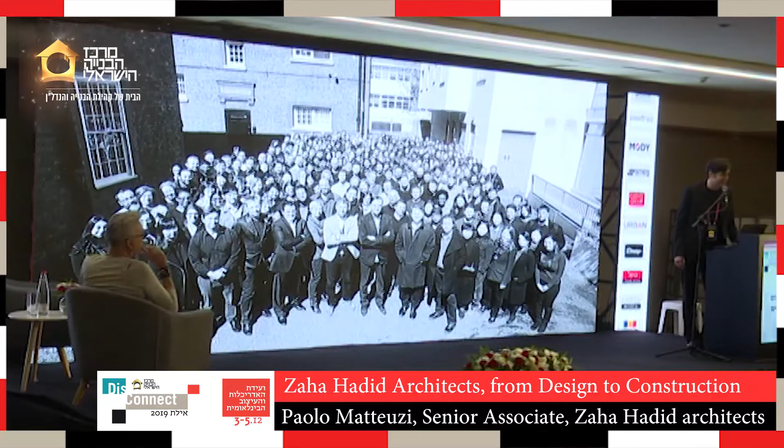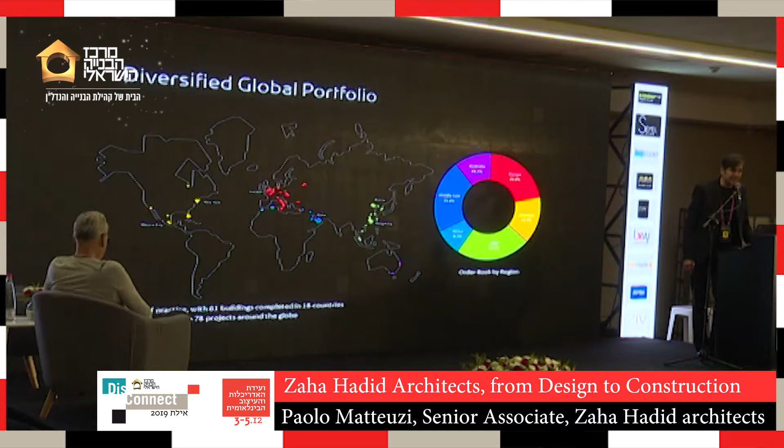Since she founded the practice back in 1979, we grew up significantly in a very niche market, I would say, thanks to her extraordinary vision and original approach to architecture and overall to the built environment. So we grew up, we are now 450 architects working from London, from Beijing, from Hong Kong, from New York, and we work worldwide. So we have projects in Europe, projects in Middle East, in Asia, in Americas. We recently expanded our business in Australia as well, where we are designing the West Sydney Airport.

So overall, in the past 40 years of our activities, we have built more than 81 buildings in almost 20 different countries, and we have more than 50 projects up and running under design development. So this is our latest delivered, completed project in Beijing, the Beijing New Airport Terminal. I think it's the biggest in Asia. Someone says the biggest in the world. I didn't check that.

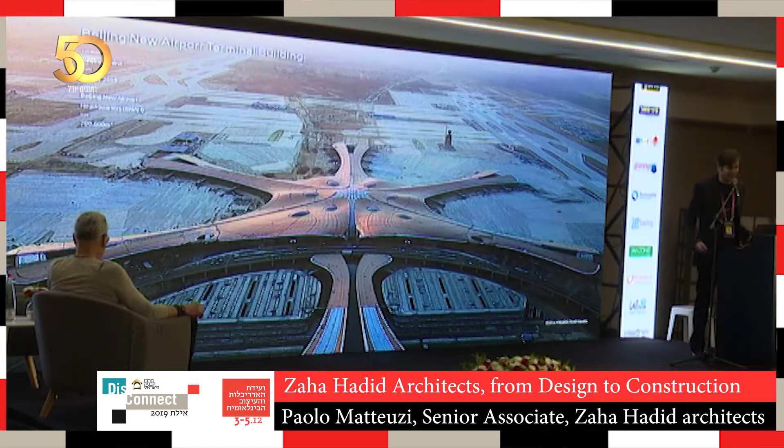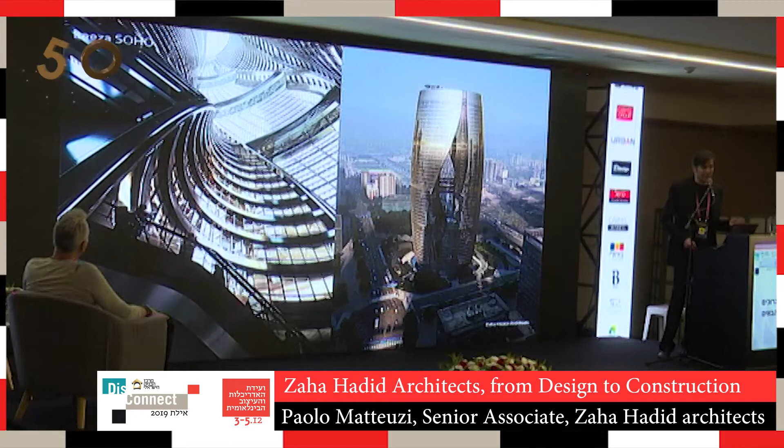Its star shape has been thought to optimize, because of the big size of the terminal, the passengers' movement inside of the building. The mega roof is supported by 6 concave columns, which are supporting the roof itself and also hosting the 6 elliptical skylights, which are bringing natural light inside of the building. This is again a building that we completed a couple of weeks ago, again in Beijing, and it's a set of twin towers which are hosting a super tall atrium which reaches the top of the building,

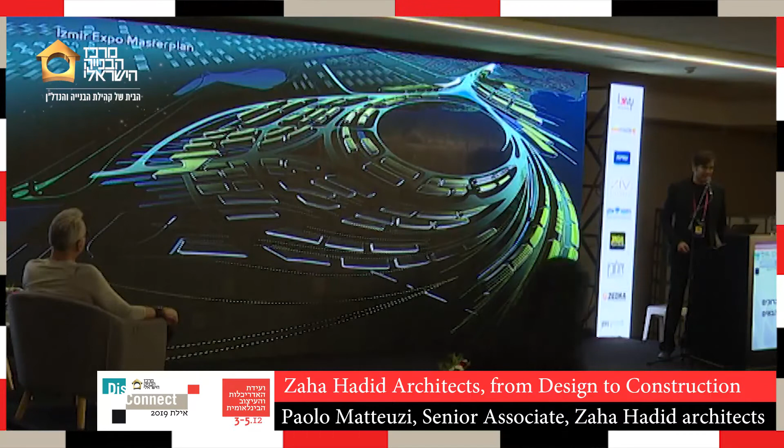so it grows up from the ground floor to 200 meters in height. Probably we are best known for our cultural landmarks, such as the Contemporary Art Museum in Rome. This is the first building I've been working on when I first joined Zaha back in 2002, or our cultural center in Azerbaijan. Overall, we do residential development, we do mixed use, we do master planning. Let's say that our activity around architecture and urban design and master planning is supported and driven by our internal research. So overall, our research is in data-driven design.

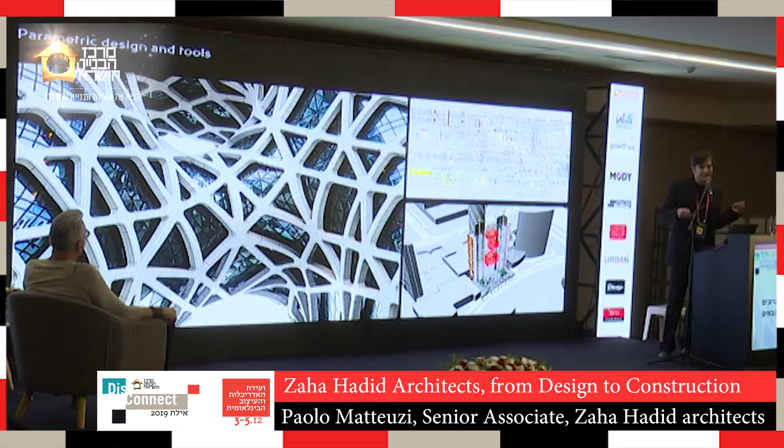So we recently opened several additional departments which are producing research inside of the company, such as the environmental analytics, the computational design, and the space planning department. Probably we are best known for our research in parametric design. So we have been pioneering this specific research in this sector over the past 10 years. And I would say that the Macau Hotel Tower is probably the highest point of our research on parametric design.

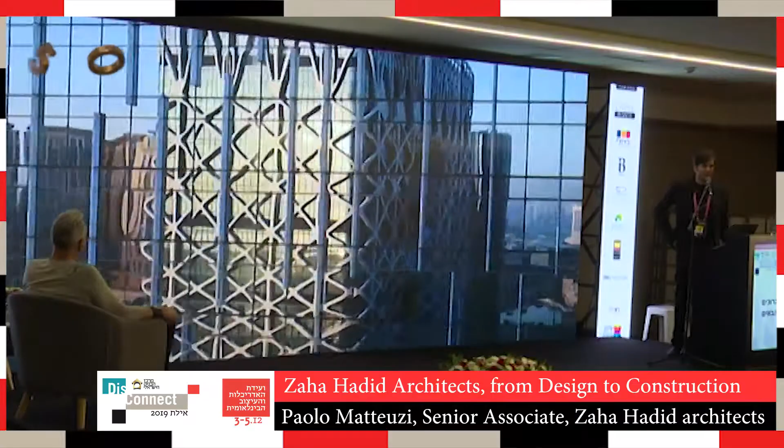This is an animation that didn't start. So just to give you a glimpse of the building. This is a movie that we shot just a few weeks after completion. It's the tallest structural exoskeleton ever built. It's a gigantic structural cage that supports the building from outside of the glazing.

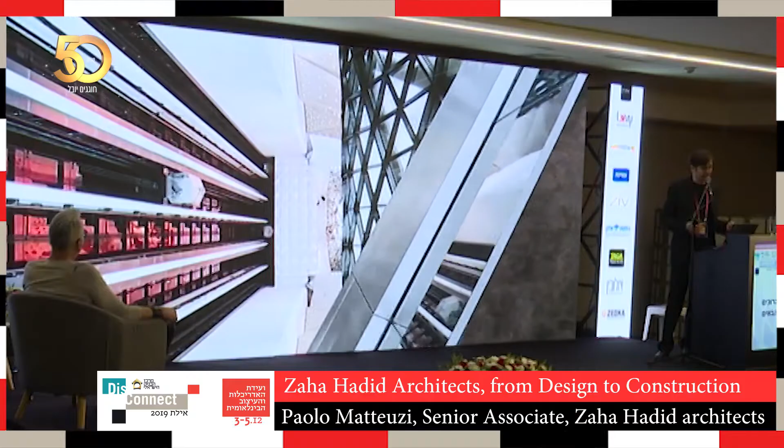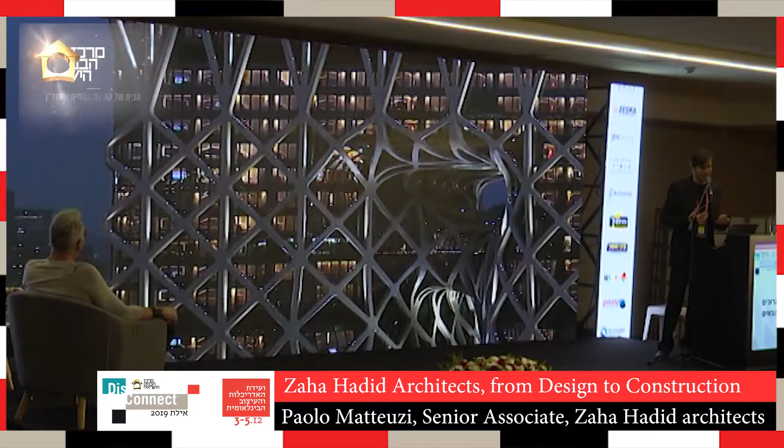The video picks the major features of the building, so the super tall internal atrium with the panoramic lift, the bridges with the restaurants and the shared facilities, the art galleries, and then the swimming pool at the very top of the building. Overall, the building behaves like a big landmark for sure, but it's also a sort of urban embroidery. So it's a precious decoration in the urban landscape.

So I decided to upload these few slides just to give you, for those of you who are not familiar with Macau, an idea where we are. So we are in the southeast coast of China, just opposite to Shenzhen and Hong Kong, on the Pearl River Delta. So there are different ways and different systems you can use to reach Macau.

So you can land there with your flight, or you can land with helicopter. You have two ferry terminals. You can now also drive directly from Hong Kong to Macau. They just completed a gigantic system of underwater tunnels, 4 cable bridges, 3 artificial islands that are allowing you to drive directly from Hong Kong through the delta of the river, reaching directly Macau.

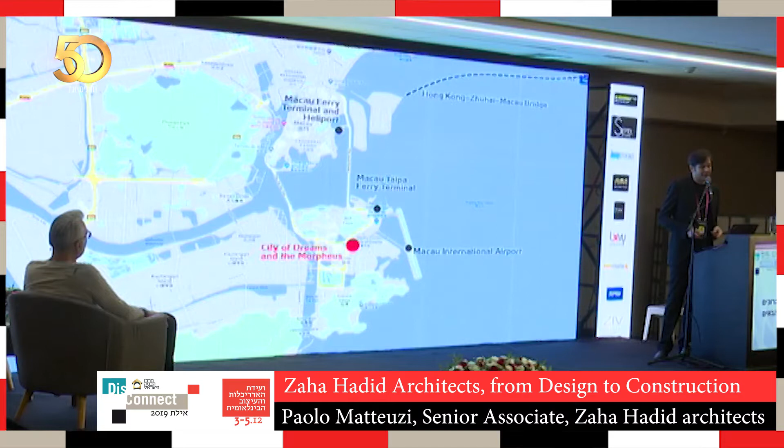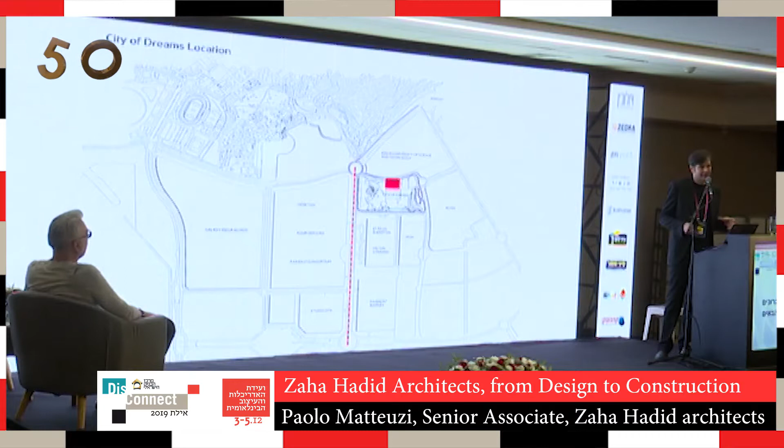But whatever system you will use to get to Macau, you will have to pass through the City of Dreams district. So, as you know, the Cotai Island hosts one of the biggest agglomerations of entertainment and amusement parks and casinos and hotels. It is the Las Vegas of Asia somehow. And the building, the Morpheus, it's just at the beginning of this urban system. So the strip that crosses north-south the Cotai Island starts effectively with the City of Dreams.

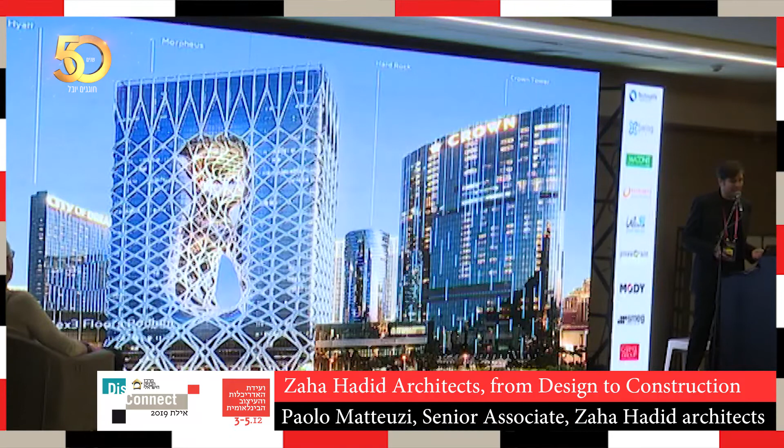So the hotel we were asked to build had 2 specific roles. So one is being a portal, so a welcoming entrance to the urban system of the Cotai Strip, but at the same time it is the portal and the entrance to the City of Dreams. So this was the idea behind the shape of the building itself, that reminds the idea of a gateway to the urban system and to the system of the City of Dreams.

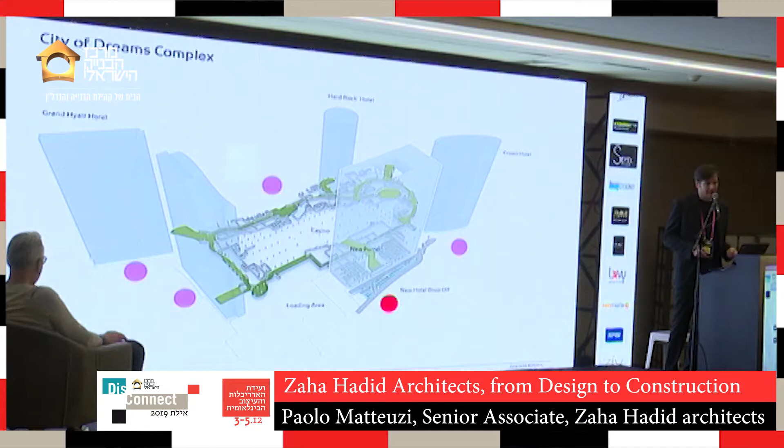So our building is the one marked with a red dot on the screen, and it gets connected to an existing podium where the casino and the retail loop, which is the green loop you see at the ground floor, connects the 4 existing hotel towers. So the Grand Hyatt, the Hard Rock Hotel, and the Crown Hotel are connected through this system.

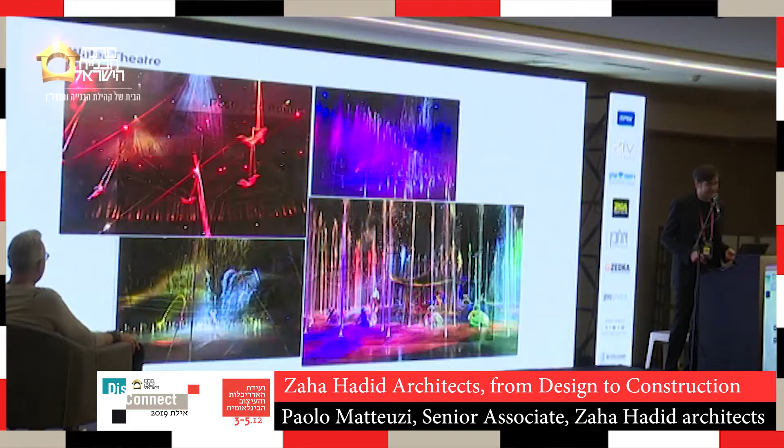Just to give you a glimpse of what is happening along this commercial strip, this ring at the ground floor. So, of course, there are halls, entrances, and banqueting hall, food court. There's entertainment, so there's a gigantic water theater. There are pop-up shops and special kiosks happening around.

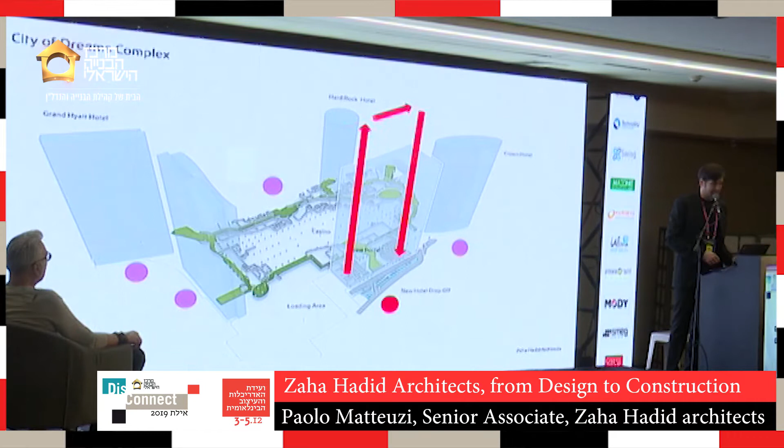So our idea for the building was not to break the continuity of this loop. So what we literally did is that if this is the ring of the existing commercial loop, we rotated it vertically and we connected and we plugged it to the existing circulation so that people could move all around, loop up into the building and go down on the second core, entering again into the system. So without breaking the experience of the existing gallery.

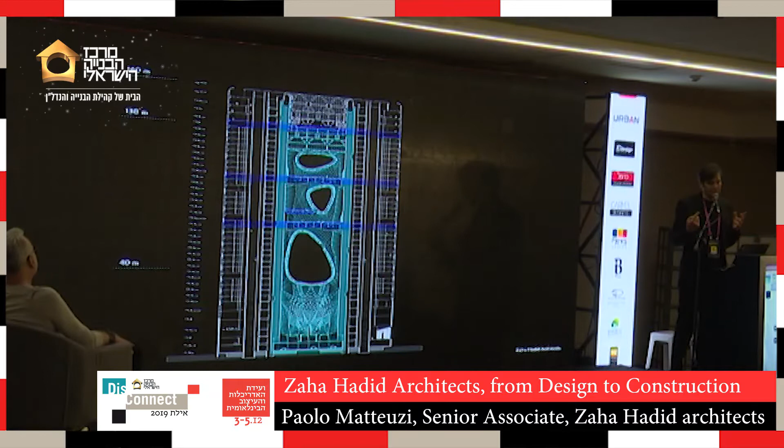Of course, while you are looping vertically through the building, you can also access in several points the internal part of the building. So there are bridges and mezzanines which are cantilevering inside of the central space. Overall, you have a set of twin cores facing each other and an activator, which is the central space included between the two cores, where the bridges and the mezzanines are cantilevering inside.

So we have about 780 rooms, which are marked in green on the two twin towers. There's a commercial podium in blue at the bottom, and there are sky villas at the top just around the casino. And in dark green, you can see the bridges and these shared facilities and the public facilities which are connecting the set of the two towers.

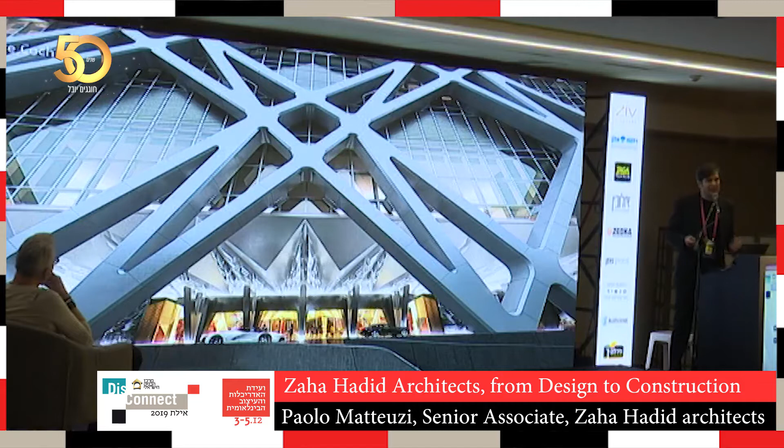So let's have a quick journey. So today's presentation is divided pretty much in two parts. The first part is a sort of an architectural overview of the building, while in the second part we will go a little bit deeper in the detail of the building and how we made it, how we did it.

So let's start from the drop-off area. So you arrive with your car in the sheltered area of the drop-off, and you enter into the main lobby. You can recognize here the two cores facing each other with the 6+6 panoramic lifts, which are leading you directly from the ground floor to the swimming pool at the very top of the building.

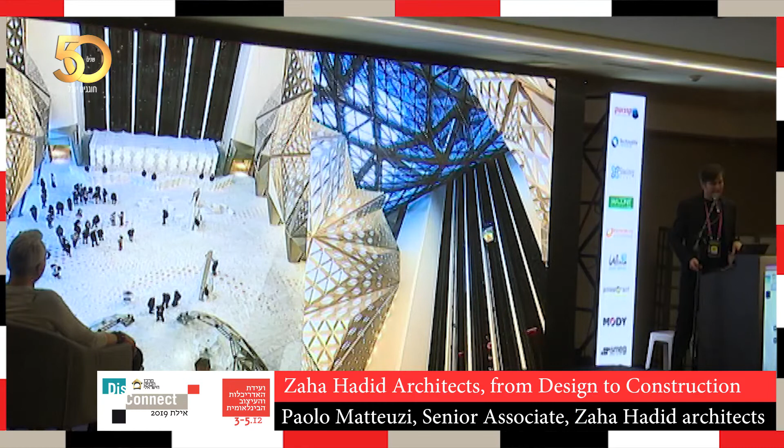So we start our journey. We get on one of the panoramic lifts. We leave the lobby at the bottom, and we reach level 21, where we have the first bridge connecting the two cores, where the Japanese restaurant is.

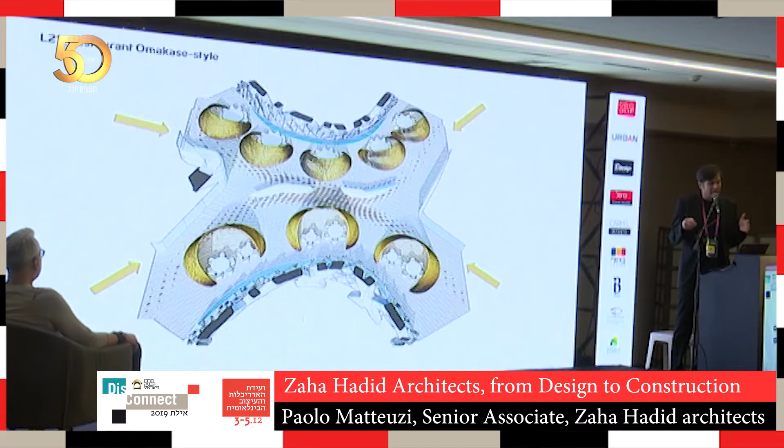So for this restaurant, we also designed the fitting out of the tables. So this sort of shell, which is embracing the tables and is flexible, so you can expand it and reduce it, so that you can host a smaller table or a group of people. So from 5 in a row to 3 in a row. This is because in China and in Asia, people like to have this kind of more private environment when having their dinner with their friends or with their relatives. So we leave now level 21 and we keep on rising with our panoramic lift.

So we are looking down to the restaurant, and looking up you already see the bridge of the upper floor spanning again between the two cores. So this is the faceted cladding of the ceiling of the restaurant, and this is level 30, where the lounge and the breakfast tables are again carved into the central space of the building.

We keep on rising with our lift. We leave level 30 and we reach the upper lobby, which is at the top of the mega atrium, where the entrances to the sky villas are. So this is the highest point of our internal atrium. Again, at the top, you can recognize the ceiling. This is the bottom of the swimming pool at the very last floor. So you end your journey up to the top of the building in the swimming pool.

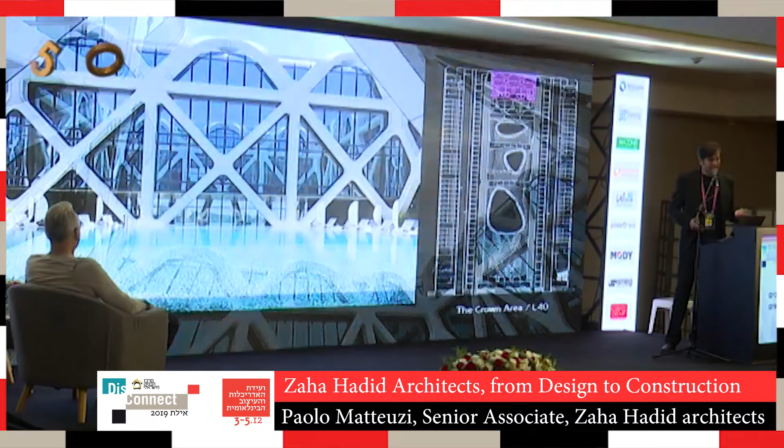The water of the swimming pool has been extended all across the building from the north to the south facade, so that we receive light not only from the central courtyard, but also from the south facade, so you can enjoy a nice sunset, and the light inside of this area is becoming particularly beautiful early in the morning and late in the evening. You can also swim through this gigantic structural element, which is another beautiful experience at this point of your journey.

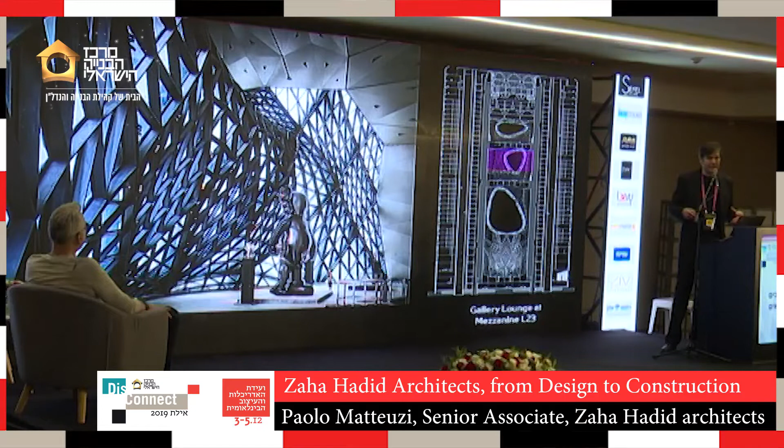And then you take the second core. You take the lift going down on the west side, and you find a number of smaller areas, mezzanines, which are only partially cantilevering and protruding inside of the central space. This is the art gallery that could be rented for special and private events. And then this is again another video which I shot with my iPhone, the day of the opening.

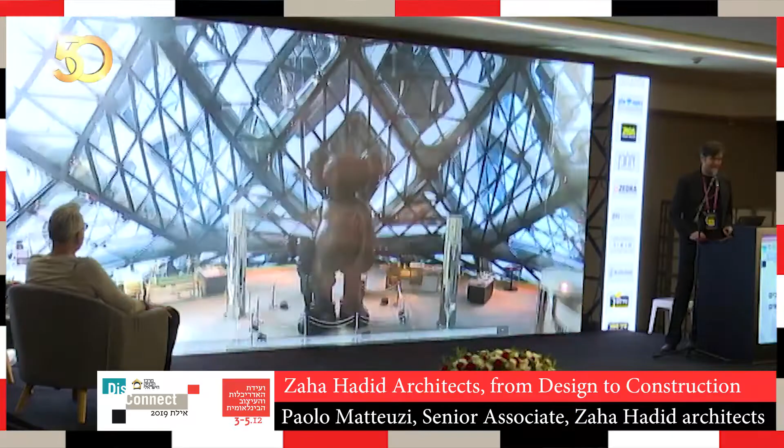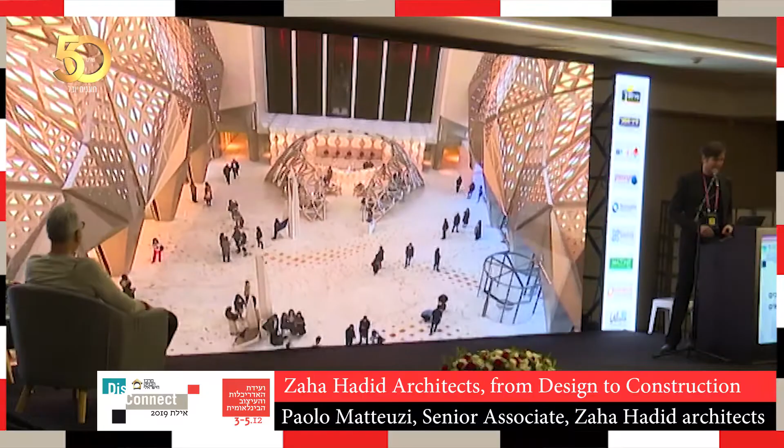So from the gallery, again with your lift, you go down, and it's interesting to see how the inside-out effect of the panoramic lift is behaving. So you always have the perception of the inside and outside of the building while you're moving vertically through it. And you land again in the main lobby.

So this is the day of the opening of the building. They have unveiled the atrium, and they played a sort of vertical concert. So the idea of the entrance lobby is that this is also an entertainment space, a space for events. The panoramic lift gets stuck at this point. The doors of the lift become lighting elements, and you can have performers or musicians, and this becomes a big show, and you're in the center of it because you're surrounded by the lift.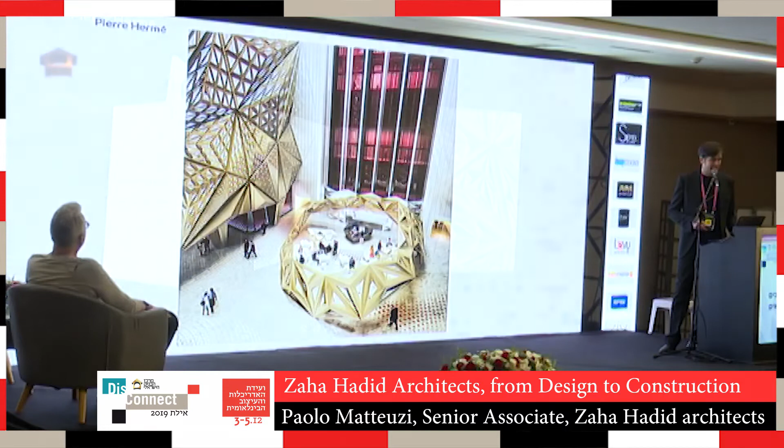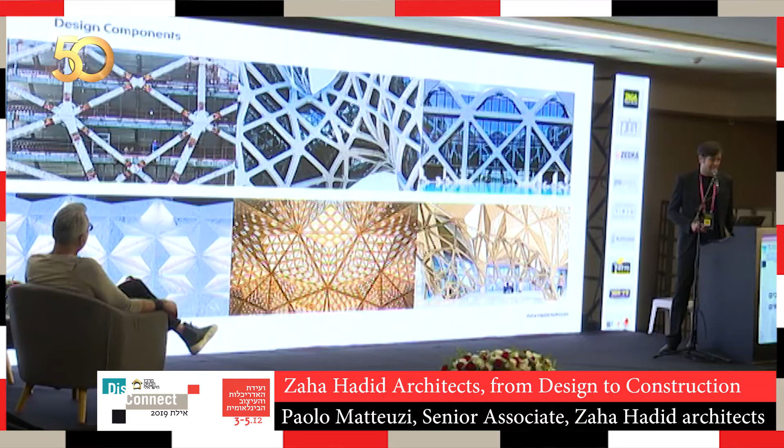We also designed this small pavilion inside of the main lobby for Pierre Hermé, the famous 3-star Michelin chef, and he designed his own line for the Morpheus, which is customized and inspired by the faceted facade and the mesh of our inside and outside design approach to the building. So the interior of the building reflects somehow the geometry of the facade, and the idea is to provide a sort of holistic approach to the experience of the building.

So let's have a look now at the technical aspect. Just to give you a better understanding, I know that most of you are either architects or engineers, and hopefully I'm not going too much in detail for those of you who are not that familiar with technical aspects, but I think it's important to understand how this building behaves structurally and technologically.

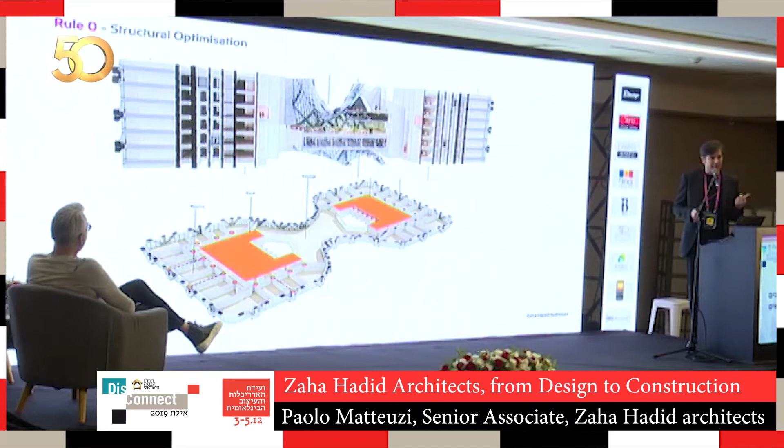So basically all the beams are spanning from the core directly to the outer structure, passing through the glazing with a number of penetrations. So all the nodes of the exoskeleton have been aligned to the slabs that you see marked with red dots on the right side of the image, and on the left you see the detail. So this is the penetration of the beam passing through the facade and reaching the outer exoskeleton.

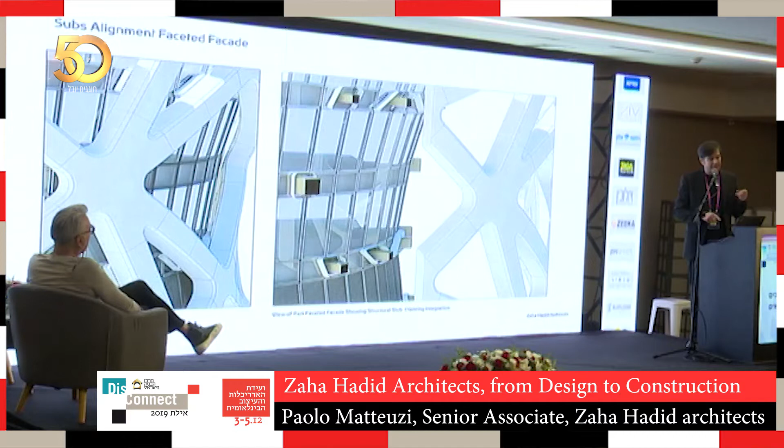Of course, only the nodes are not enough, so whenever a member is crossing the slab, this establishes a structural connection to the building itself. So each time you have a different penetration of beams spanning from the core to the exoskeleton. And those are all the penetrations.

There are hundreds of different penetrations through the building. This is just a small table showing the different conditions. Basically, this is allowing us to reach a completely column-free space. So each floor is absolutely column-free, ensuring the maximum flexibility, and you can really enjoy the space because the structure is completely either outside or inside toward the cores.

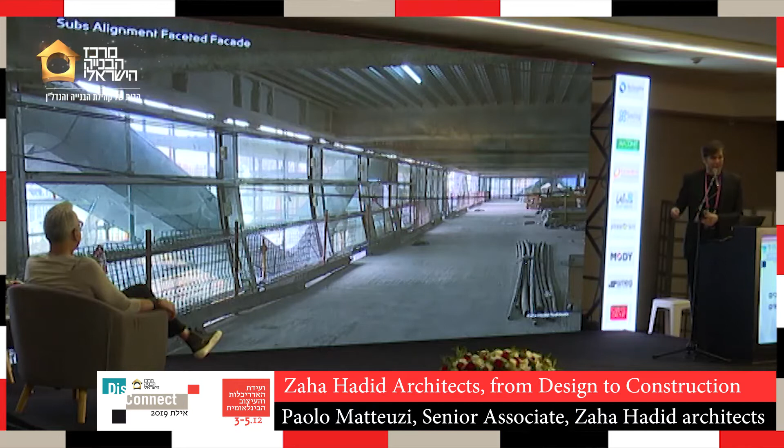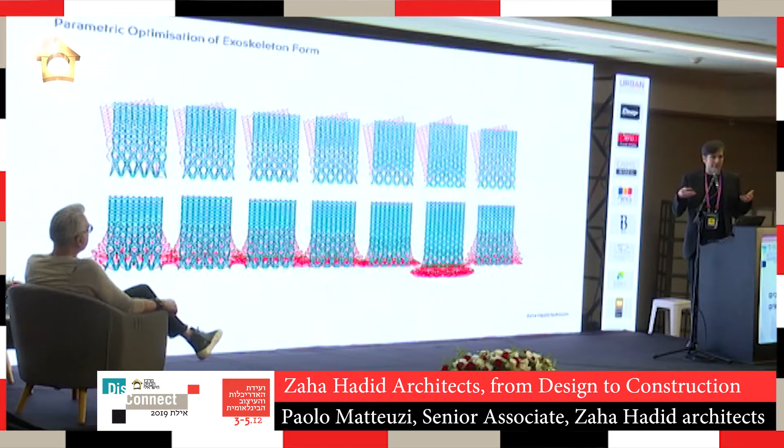Overall, the exoskeleton and the cores work together not only because they bring the vertical loads down to the foundation, but also and mostly because they react to horizontal forces. So basically the connection that has been established between the exoskeleton and the cores is ensuring the building gives a proper answer to the horizontal forces received by earthquakes.

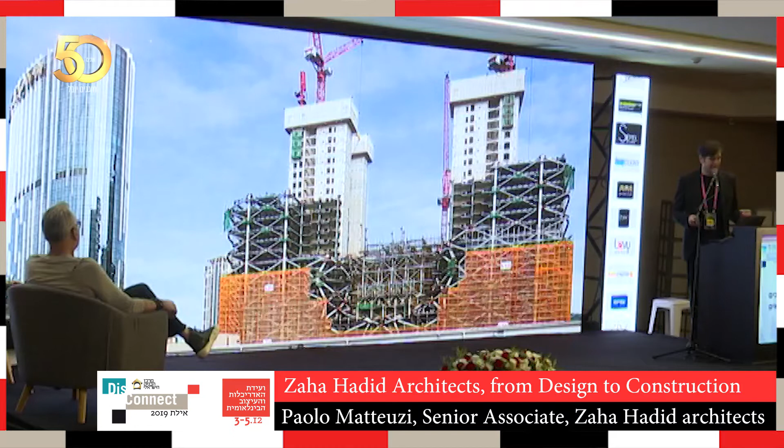And those are some slides from the construction site. So you can recognize the twin cores, which are growing a few days apart. You can see the slabs and the exoskeleton following and wrapping, literally wrapping the 2 cores, and some close-ups in the same phase of construction.

So this is where we were at the end of schematic design. The engineers came back to us, they analyzed the exoskeleton, and they gave us all the structural profiles to ensure that all the loads were properly transferred. But they also gave us bad news: in the central belly, the central part of the building, the structural components were simply gigantic. They were almost obstructing the view from our platform and the view from our bridges.

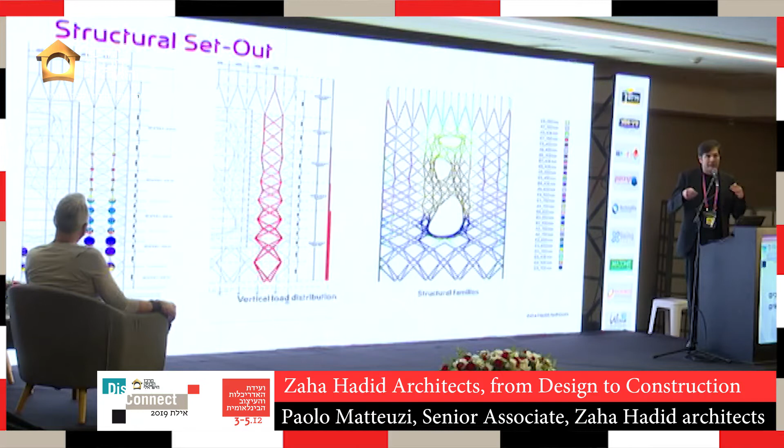So at the end of schematic design, we went through optimization of the structural internal part of the building. We analyzed the central part bottom up, starting from the ground floor up to the roof. And I will now give you an idea of the most important structural components that finally help this building to perform the way it's performing at the moment.

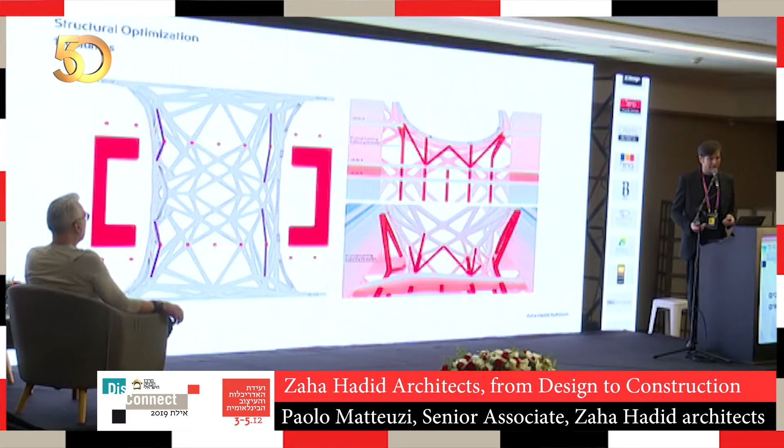So we extended the columns of the atrium to reach the glazing, the bottom part of the belly. We branched the columns to reach the nodes of the skylight. And as you can see here, the zigzagging of the facade here.

Can you see the mouse?

Yes. This is following the branching of the columns. As you can see, they point toward the nodes of the skylight. So here the skylight is effectively spanning from north to south, supported directly by the branching columns.

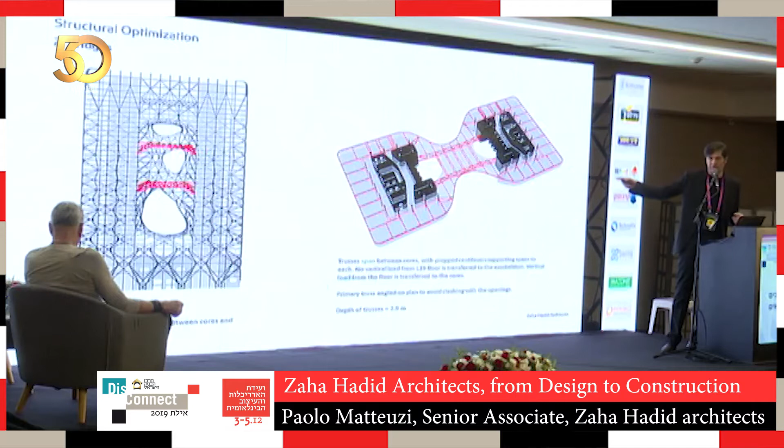Going ahead, the other problem we had is that all the slabs were entirely supported by the exoskeleton. So we had a very big load that the exoskeleton had to support in the central part. So we offloaded part of this load by introducing trusses spanning again from core to core. And basically in this area the exoskeleton is providing the horizontal stability and picks up the load of the 4 triangles which are left out from the typical sandwich shape of the bridge at this floor.

And then we came to another solution for the entire central part, which we call the stitching. We reach the nodes all around the boundary of the central area, every other floor, with internal propping columns. You can see these diagonals here, which are again spanning from the core toward the nodes of the facade. This ensures that at every other node, the loads are carried down through the diagonals directly to the 2 cores of the building.

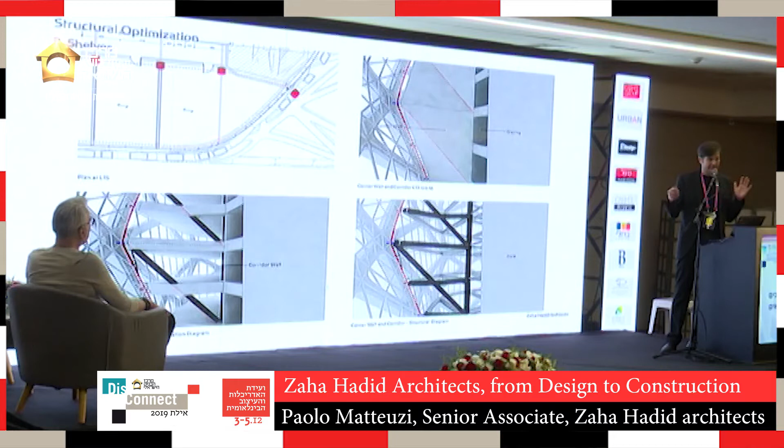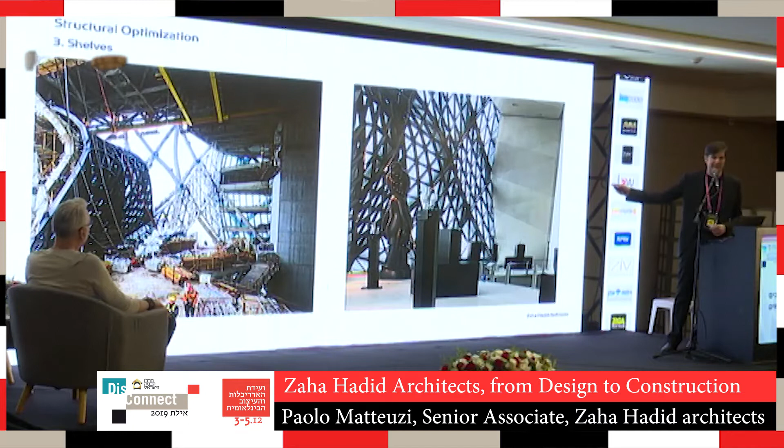In this way, we have created a very interesting feature, because the faceted design of the internal walls is a characteristic of the building, but at the same time is the structural answer to support the central belly. And here on the left, you can see the diagonals, which are supporting the exoskeleton every other floor. And this is the faceted internal facade of the art gallery.

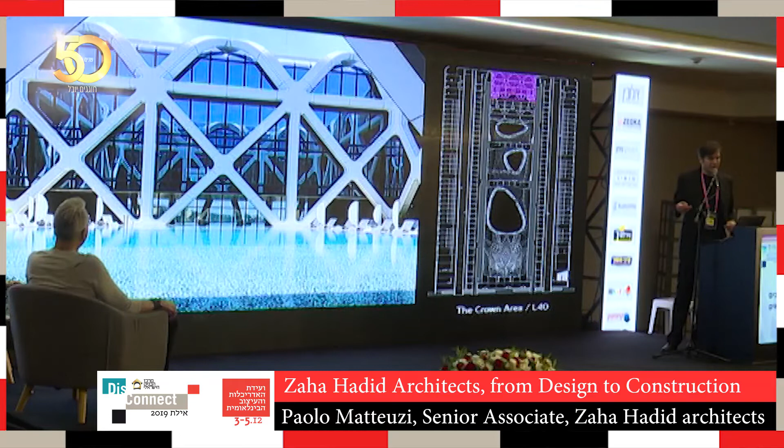The last 2 components are at the very top of the building. There we had a gigantic load because we had a swimming pool, and the swimming pool is in between the 2 cores. So we had to span with a big truss, which is the one you see here. This is a 9 meter high truss spanning from core to core to support the load of the swimming pool at this level.

At the bottom of this truss, there is a second one, which is instead again supporting the belly. So basically from this second truss that you see diagonally there, you have those stubs which are hangers to the exoskeleton and to the facade at the bottom. So the facade gets completely supported all around its own perimeter.

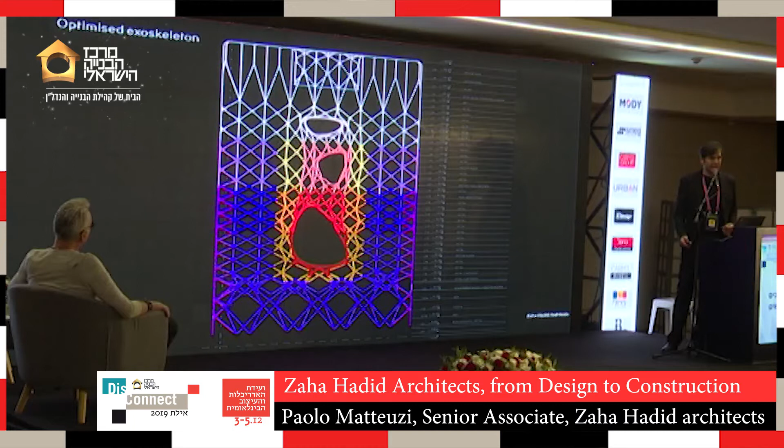So we ended this phase with a completely revised structure of the exoskeleton. We gained the proper structural profiles for the central belly, ensuring the view from our platform and the view from the terraces.

The second problem we had was about the geometry. So as you can imagine, because of the free form of the exoskeleton in the central part, what happens is that all the structural members were twisting. And a structural twisting member doesn't perform well. So we had to reduce the structural profile to be fully planar.

So each structural profile has been constrained in a single plane and has been singly curved. So it's bent in one direction only. So we identified all those planes, basically, which are identifying the axis of all the structural components. By doing so, we ensure that all the forces which are crossing into the nodes are transferred through vertical and flat planes.

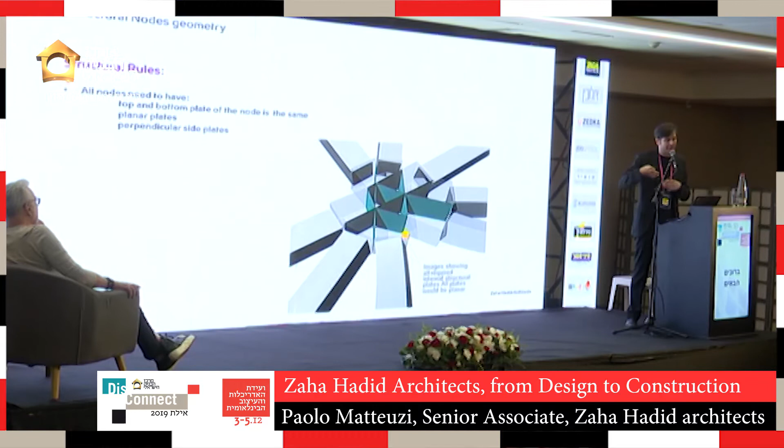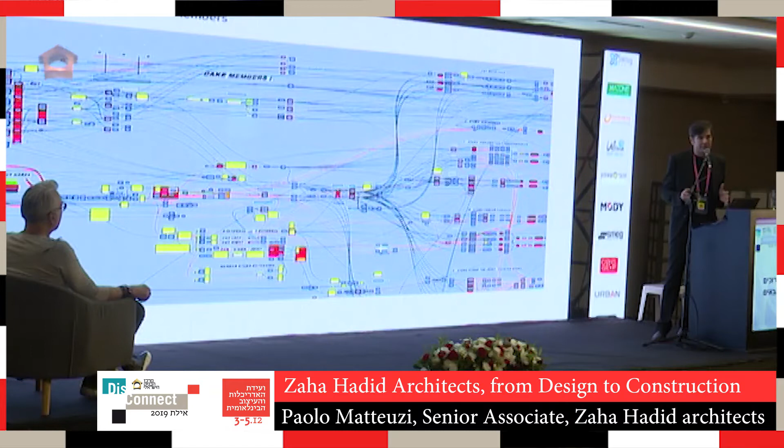Because the members are reaching the node with different rotation, of course we had to manage the depth of the node which was receiving the member itself. And all those parameters that I just had to list very quickly, and some of them might have not been clear in full, I mentioned because, as I was saying at the beginning, this is a parametrically controlled building, so all those data have been brought into our algorithm, have been managed through the algorithm itself, and all the components have been baked out of the algorithm to be rebuilt on top of the shape of the massing that we generated.

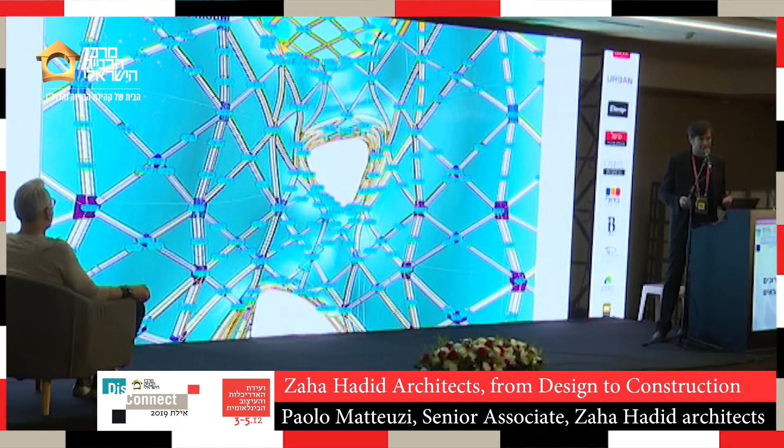So all the planes have been extracted from the algorithm, all the nodes and all the members with all the dimensions, proportion, rotational angle, curvature have been calculated directly by the algorithm. We calculated also the structural volume of the structural components, meaning that we ensured that whatever the engineers would have done, they would have done it inside of this red box, while we were working in parallel on the aluminum cladding on the outer part of the building.

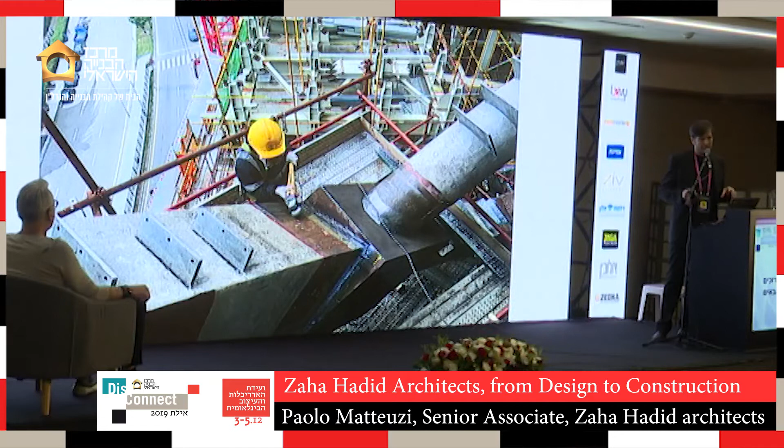And those are some images from the site, so you can recognize the member getting to the node rotated, and some polishing of the nodes, also the proportion of the node in the space. They were really gigantic. And again, some images of them during construction and before cladding.

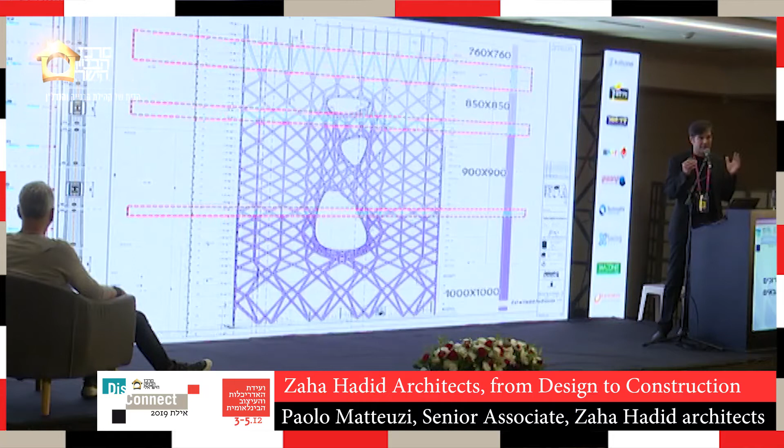So overall, the cladding is following the exoskeleton. It tapers, so that it is lighter at the top and wider at the bottom, exactly as the structural components are doing. So the cladding as well is following the same rule, just not to be too heavy at the top. Everything has been brought to the wind tunnel test to control the pressure of the wind on the outer part of the cladding. And the results of these calculations have been then plugged into the beam model of the facade.

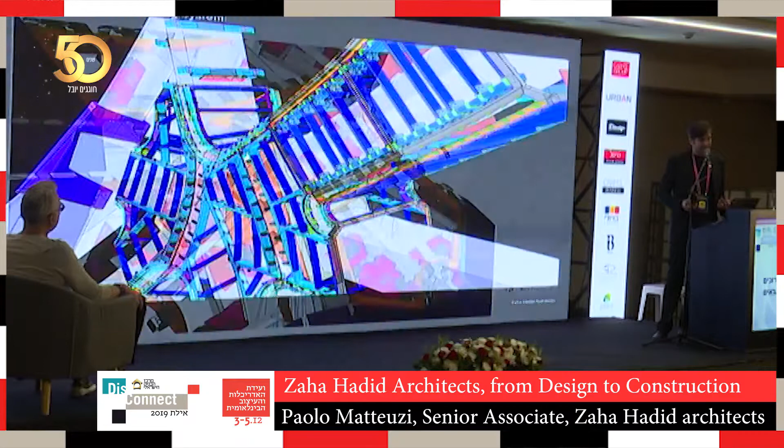So every single plate, every single stiffener and bolt, everything has been calculated through other algorithms that have extracted the secondary components. This is what you will never see of this building because this is behind the aluminum panels. But everything has been designed in 3D and directly fabricated. And this is the result. So we took the panels, we brought them on our visual mock-up. We checked the consistency of the tolerances.

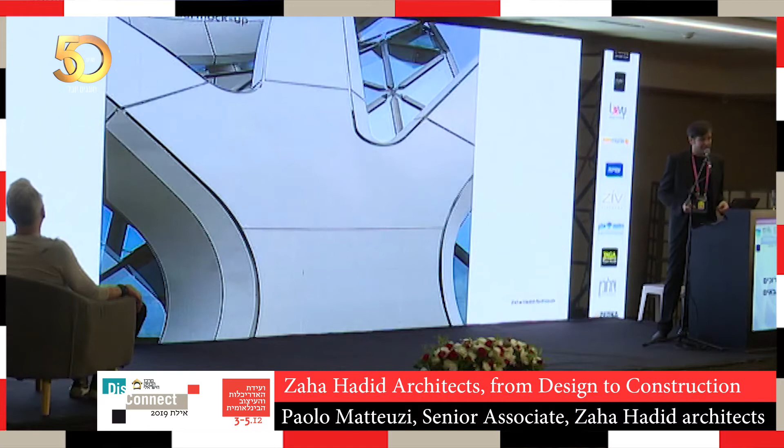So through this parametric control, we managed to control the tolerances of the building in the range of plus minus 2 millimeters. So everything has been very, very accurate in the way it has been designed and then further manufactured and installed on site.

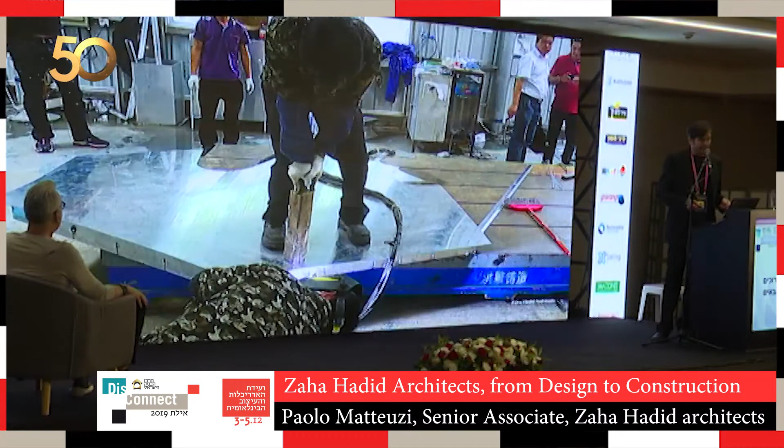And now just to close, very quickly through the fabrication process of the facade components. So the outer part of the aluminum cladding is still a doubly curved surface. So we had to create molds, which you can see here on the floor in aluminum plates. And then we cut the aluminum panels, the flat sheet. We pre-bend the aluminum panel, and then we weld it on top of the formwork.

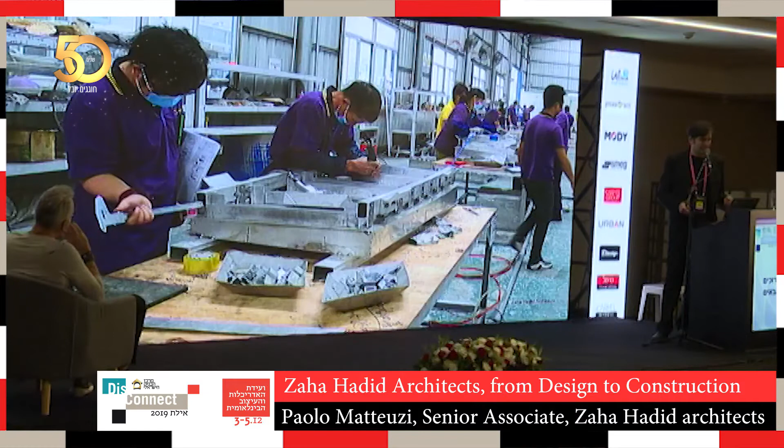We then use the CNC cutter to refine the edges of the aluminum, which is now a three-dimensional component. And then we check all the tolerances and the dimensions have been properly taken. We start the production of the frame to support the aluminum cladding, and we weld it at the back of the aluminum panels. We then remove the formwork, which is this element here.

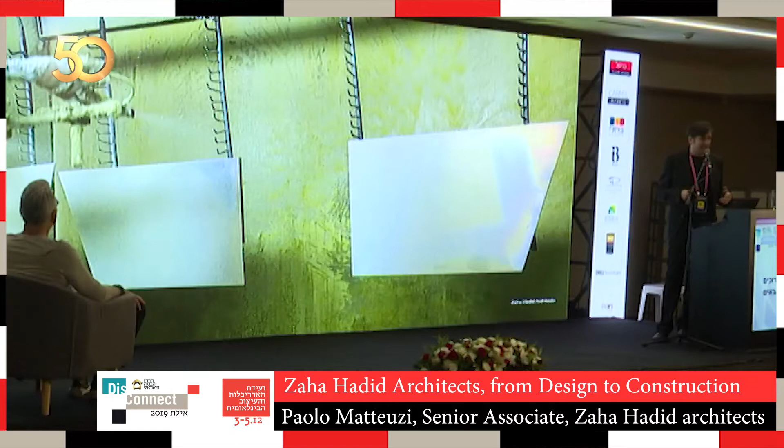We pre-assemble everything in the factory just to be sure that all the components are properly fitting and matching, so as not to have surprises when you enter on site. We then dismantle everything, we coat the panels, and we bring them on site. We test them on the visual mock-up, and then in the final construction site. And those are the images of the work in progress of the aluminum cladding in this area of the facade.

And the final results, so the single curved area, the flat area of the facade, the transition toward the central belly, and then the most complex part of the building, which is the internal atrium cladding facade.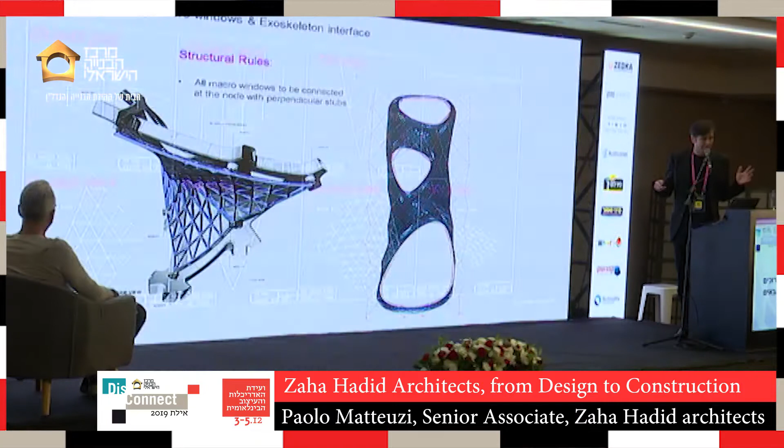If you're not too tired, I will give you also a glimpse on the glazing, just to let you know how it works. So basically, the internal mesh has been subdivided in macro components that we call macro windows. So basically, on the projection of the outer exoskeleton, we literally trim a rigid component, which is basically the macro window itself. Those are the macro windows in 3D.

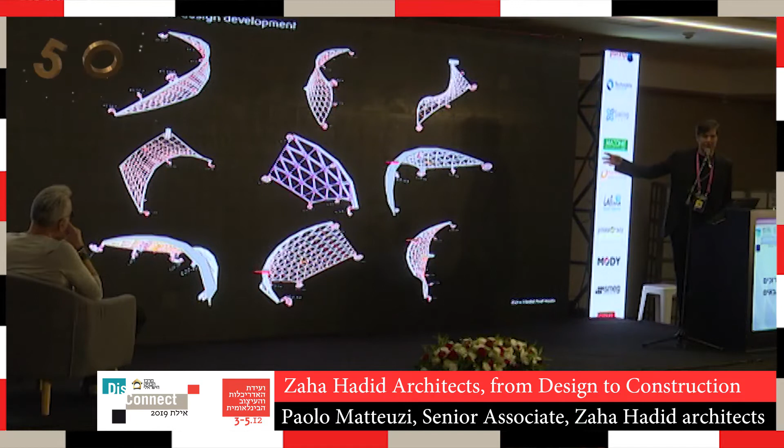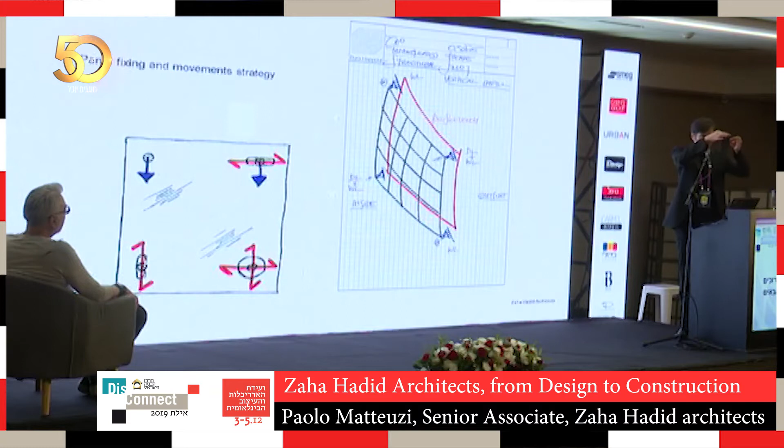You can recognize the stubs. Those are the connections toward the exoskeleton. So the exoskeleton is supporting the macro windows. Everything has been checked again in the BIM model, so in a full three-dimensional environment, of course. And the way it works is very simple. So basically, if this is your macro window, you hang it from the top, right, this way. Then you put it in the right position, and then you hold it back at the bottom.

So each macro window is supported in 4 points, exactly with this principle, and they're all independent one from the other, and they're all separated by movement joints. And this is the rigid component of the single window that has been fabricated, again brought on site, and put in the right position in the space, supported by the exoskeleton.

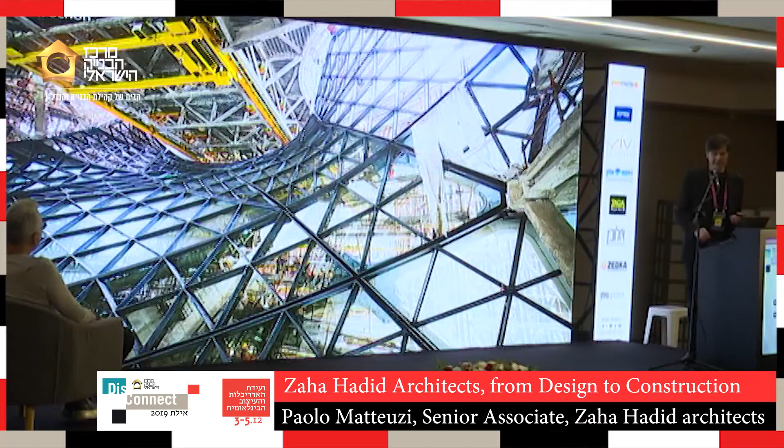This is the same image that you've seen at the beginning, the one with the faceted ceiling and the bridge spanning with the macro window at the bottom. And again, the final images from the site. The openings that you see here are the maintenance hatches. So basically from inside you can easily open those triangles and you can access the facade for general maintenance, cleaning, replacement and so on. And those are just some close-ups on the internal part.

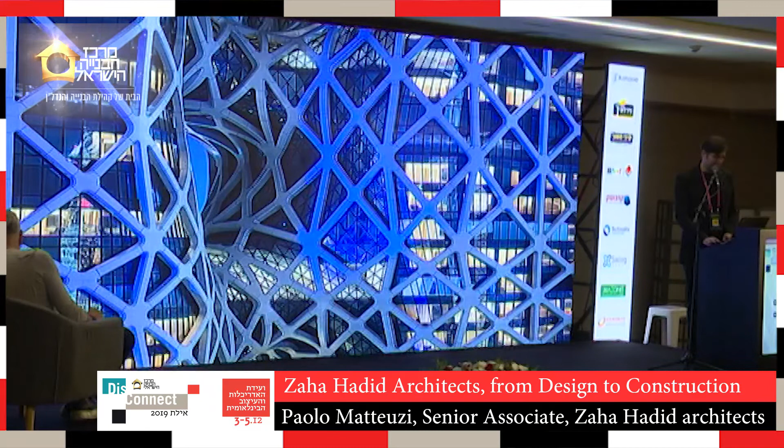So overall this is the completion of the building, and I will leave you just with a final video that summarizes what we just went through. So all the 3D data that has been used and the way we did it.

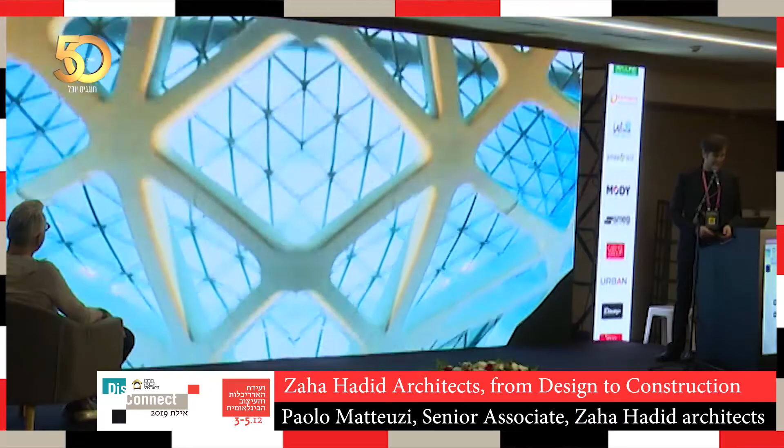There should be a sound as well, but it's not coming. Never mind. Yeah.

So the visual mock-up. And the idea of the video is to put together the real images of the building, such as this one and this one, with some work in progress and some glimpse from our design activities, but also the fabrication of the components. So those are the megastructural elements of the exoskeleton, the erection of the twin cores, and the erection of the exoskeleton itself.

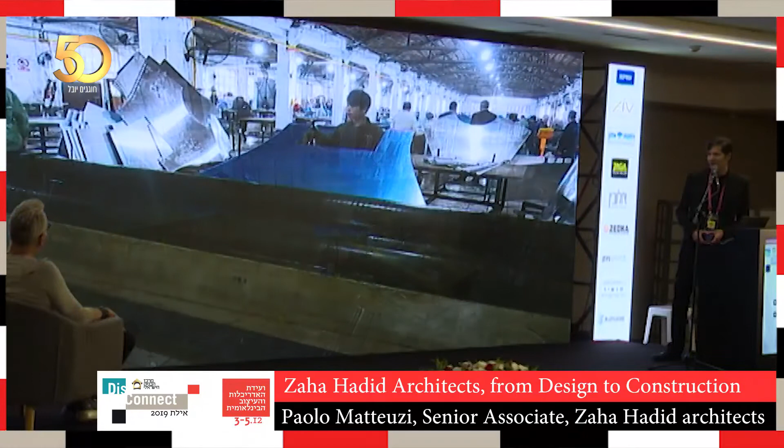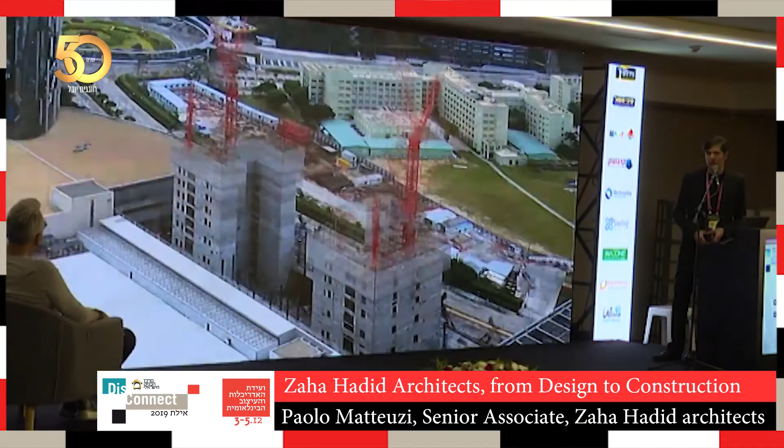The macro windows, and the final structural elements. The fabrication of the aluminum cladding, the bending of the framing, the pre-assembled phase, and then the coating. Then the coated panels get packaged and transported on site. What is a combination of technology, innovation, and craftsmanship.

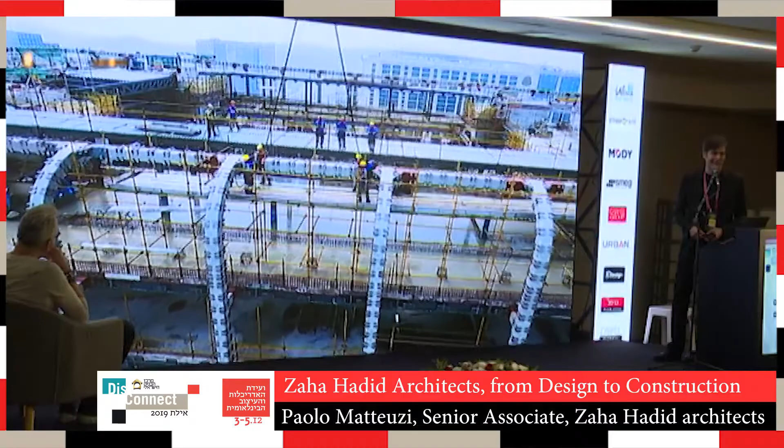And this is the topping out of the building, so that's the last structural component of the exoskeleton put in place. After this one, we had a gigantic party, as you can imagine, so we all joined on site and celebrated this moment.

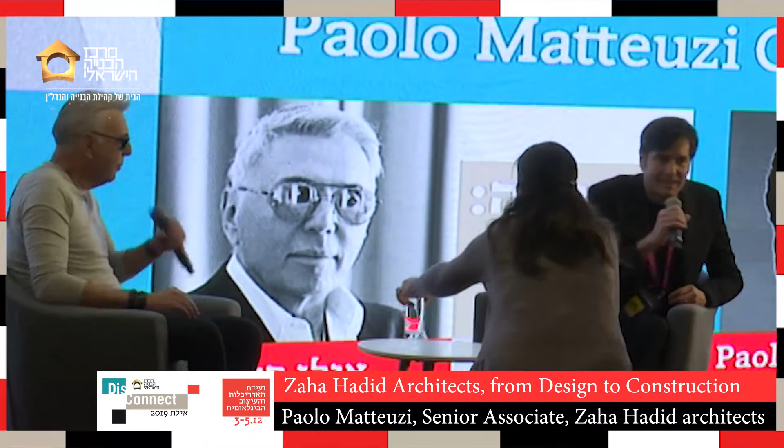Really beautiful. And the design was started while Zaha Hadid was still alive? Yes, actually this is the last building she attended the opening of. Oh, really? Yeah, so it's the late Zaha Hadid, we can say. Yeah, she was alive all the... because it has something different to my eyes. It's very Gothic, you know, like a Gothic cathedral.

And also the craftsmanship and every piece and the fact that the construction is from out to in, and also some of the symmetries are almost Baroque, you know, in the cultural side of the architecture. It's innovative, but at the same time it's very much part of a long legacy of great architecture.

Yeah, I mean, you're perfectly right, and of course, as always, there are several reasons for coming to a massing for a building. And in this case, we've been asked to provide a very high level of efficiency. So overall, we had to somehow comply with a given brief, which was including the request from the client of creating a very, very iconic building.